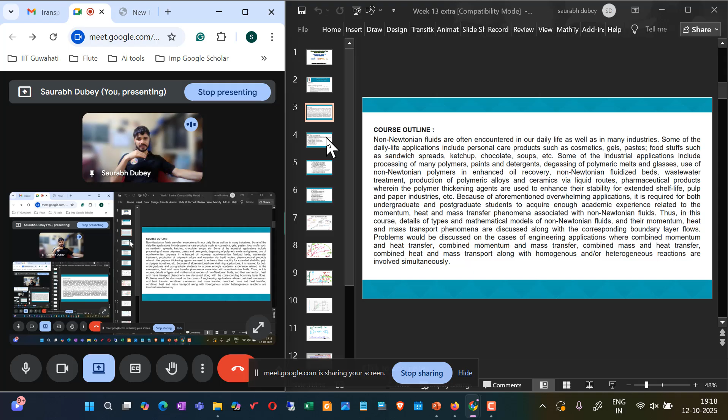The course plan was very straightforward. In week 1, we discussed the basics of Newtonian and non-Newtonian fluids. The introduction of Newtonian fluids was made, and then how these Newtonian fluids differ from non-Newtonian fluids was discussed in detail, including time independent non-Newtonian fluid, time dependent non-Newtonian fluid, and viscoelastic non-Newtonian fluid. So different types of non-Newtonian fluids were part of the first week, mostly the difference between Newtonian and non-Newtonian fluids, and the different types of non-Newtonian fluid, discussed in detail in the first four lectures of the course.

The second week was about how you are going to calculate the rheological property of any fluid which is unknown to you. For example, any gel in your daily life you encounter, and you want to measure what is the shear stress to shear rate relation of this particular gel, so as to compute its viscosity. If it is Newtonian, what is its viscosity? And if it is non-Newtonian, what is its apparent viscosity at a given shear rate? That is very crucial for you to appreciate at this point.

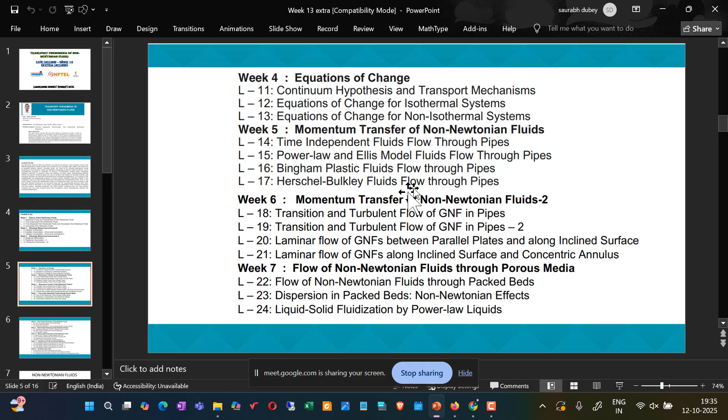After week 8, we are mostly having this thermal transport mechanism along with the momentum transport mechanism together. So free convection between two vertical plates we discussed, heat generation we discussed, and temperature distribution in the fluid confined between coaxial cylinders we discussed.

Those were very important topics, and we solved very beautiful questions step by step to make things easy for you. If you are revising all those questions that we have derived and discussed, and the questions given to you as a weekly assignment for the examples of the lecture, you will surely easily score well in the exams.

At the same time, clear your concepts and understand the subject deeply. That is the sole purpose of the overall effort made by Professor Nanda Kishore sir and our team, the entire NPTEL and SWAYAM team, and the policies. Because of this, this is provided to you.

So week 9 was on the thermal phenomena of non-Newtonian fluids. Again here, temperature distribution for fully developed flow of Newtonian fluid in a tube we discussed. Heat transfer combined with chemical reaction we discussed, and transpiration cooling we discussed.

So now, just wait, let me open it up.

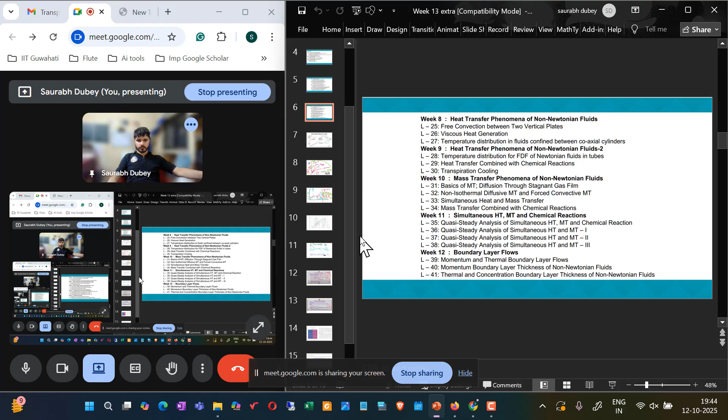So this week 12 that we discussed, everything on momentum and thermal boundary layer flows, momentum boundary layer thickness calculations for non-Newtonian fluids. Especially this particular boundary layer is very different from the concepts of boundary layer you know till now, in any other course or the basic transport phenomena course you have done. Here the fluid is non-Newtonian—pseudoplastic, dilatant, Bingham plastic—and you have tried to do calculations that are more towards the realistic systems in application.

And afterwards, in the last lecture, we covered the thermal and concentration boundary layer thickness. For this thermal and concentration case also, you have derived it, and for non-Newtonian fluids you have done it. We solved many problems through questions for the pseudoplastic system, Bingham plastic system, and lots of solutions are derived for the pseudoplastics, the power-law systems, in class.

So I hope this particular course, starting from week 1 to week 12, if you revisit, you will come to know that lots of very important concepts of fluid mechanics, heat transfer, and mass transfer became very handy in understanding this particular combo course, which is transport phenomena.

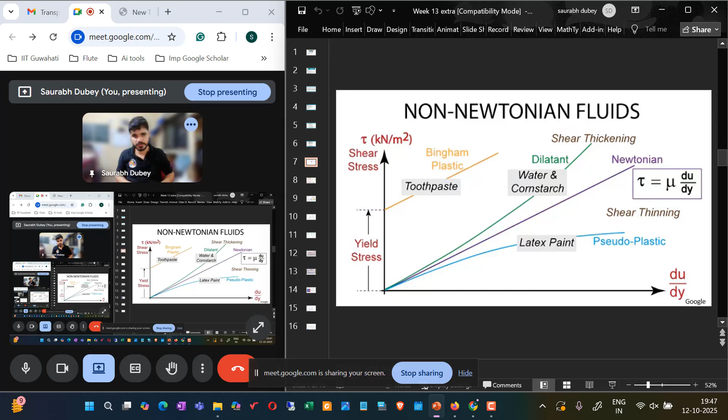So this covers non-Newtonian fluids, Newtonian fluid, pseudoplastic fluid, dilatant fluid, Bingham plastic - everything discussed in detail, including the non-linear behavior, that is the curve between shear stress and shear rate. We have also covered the constitutive models, the general models available for these non-Newtonian fluids. That we have discussed.

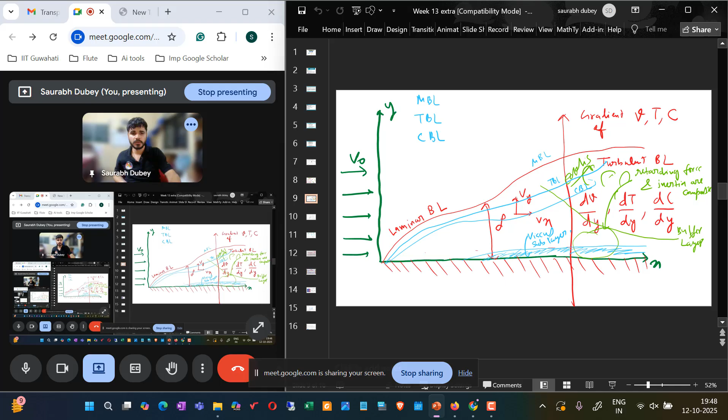Now if you see, the boundary layer theory that we have seen - we discussed that very important concept. There will be fixed some questions coming from this particular slide and this particular topic.

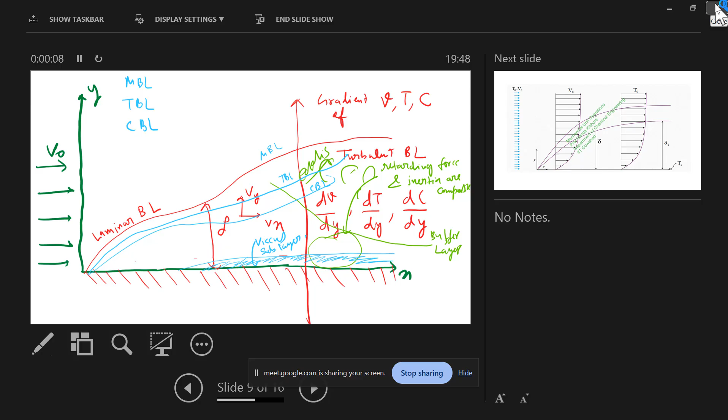The basic of this particular topic is - let me just expand it a bit. This particular topic is: what is boundary layer?

Boundary layer is the reason - simply just remember, boundary layer is a place where gradients exist. Gradient of what? Gradient in the fluid mechanics subject is momentum, which is velocity, so gradient of V. Gradient in heat transfer subject is temperature, gradient of T. Gradient in mass transfer subject is concentration, gradient of C. So gradient of velocity, temperature, and concentration - momentum, thermal and concentration respectively - are the gradients that usually exist in this particular coarse region, which is the boundary layer.

So have you ever thought about this - the viscous sublayer, the turbulent boundary layer, or the buffer layer - do they exist for momentum boundary layer only, or do they also exist for the thermal boundary layer and concentration boundary layer, right? Have you ever thought about this? Just give it some thought.

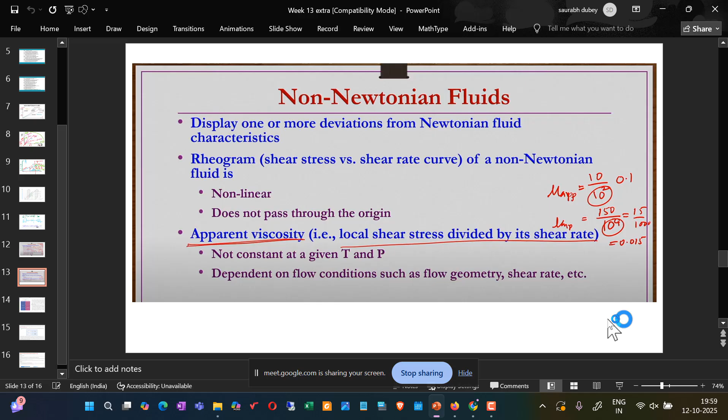And it is not constant at a given temperature and pressure, and it depends then on flow conditions such as flow geometry, shear rate, etc.

Very important and very good source of this difference between the Newtonian and non-Newtonian fluid I found on PEDIAA, and I have used and acknowledged here. You can also visit this particular link. There they say that the difference between the Newtonian and non-Newtonian is, Newtonian fluids are fluids that follow Newton's law of viscosity, which is mu du by dy, is shear stress. Now, this law indicates that the shear stress of a fluid is proportional to the rate of deformation, with the constant of proportionality being the viscosity of the fluid. This means that the viscosity of the Newtonian fluid remains constant regardless of the magnitude of the applied stress or the rate of deformation. Water, glycerol, alcohol, and mineral oil are a few examples of Newtonian fluids.

Now, Newtonian fluids have the ability to flow freely when subjected to applied stress. This is because the viscosity of the Newtonian fluid does not change with the magnitude of the applied stress. Hence, these fluids can be easily pumped or transported through pipes and channels without significant changes in their flow properties. They also exhibit laminar flow behavior at low flow rates and high viscosities. Laminar flow occurs when a fluid flow is in layers, with each layer moving in a parallel direction to the adjacent layer. So this is one.

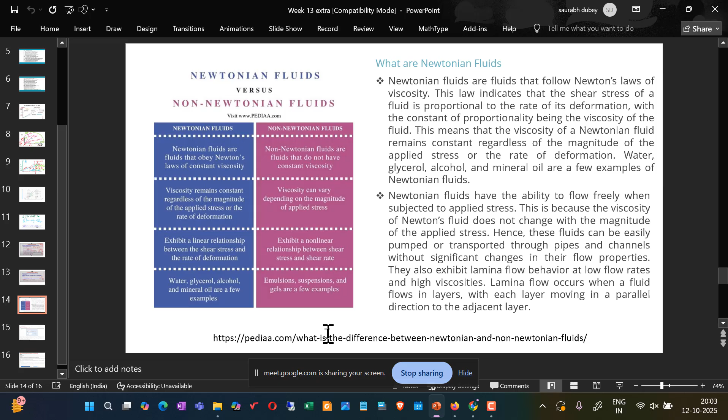So you see this, this slide is important. Newtonian fluids also have some limitations. These fluids may not exhibit the flow properties of real world fluids such as blood. So for that you need non-Newtonian fluid definitions.

Non-Newtonian fluids are fluids that do not follow Newton's law of viscosity, and depending on the magnitude of applied stress, the viscosity of the non-Newtonian fluid can vary. For example, emulsions, suspensions, and gels are examples of non-Newtonian fluids.

Non-Newtonian fluids exhibit shear thickening behavior or shear thinning behavior. Shear thickening behavior occurs when the viscosity of the fluid increases with the magnitude of the applied stress, while shear thinning behavior occurs when the viscosity of the fluid decreases with the magnitude of the applied shear stress.

These liquids also show complex flow patterns such as vortex formation, shear banding, and flow instabilities. These flow patterns can significantly impact the transport and mixing properties of non-Newtonian fluids. Let me just make this point clear, guys, then it will become easy for you to appreciate this.

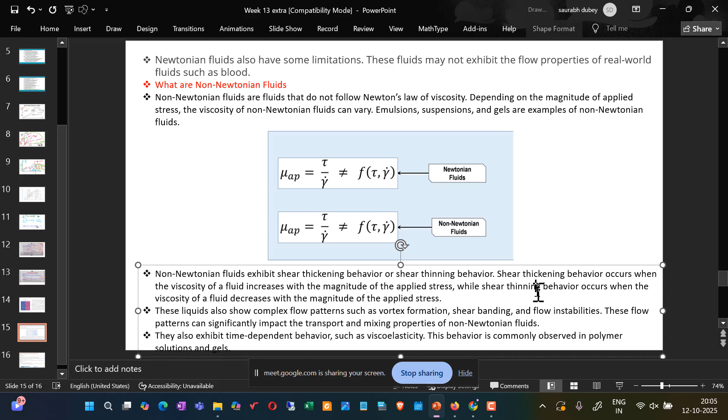So in this one, for the Newtonian case, mu apparent is what? Shear stress divided by shear rate, and this has to be corrected. So mu apparent is nothing but mu, and we can correct it like this. So I can't write, let me just fix my pen tablet. Okay, now I can write.

So this mu apparent equals mu equals what? Tau divided by the rate, for Newtonian fluid, that holds. For non-Newtonian, this is not true. Rather, this mu apparent is a function of shear rate.

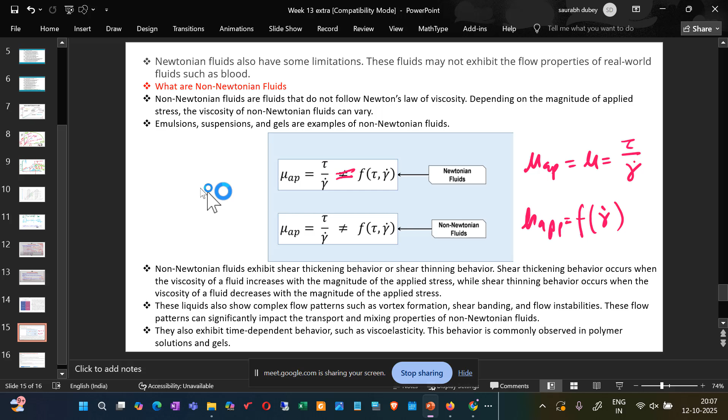So now you see this, the last slide about the definitions and differences between Newtonian and non-Newtonian fluids. The main point is the definition itself: Newtonian fluids are fluids that obey Newton's law of constant viscosity, whereas non-Newtonian fluids do not. In a Newtonian fluid, the viscosity remains constant regardless of the magnitude of the applied shear stress or the rate of deformation, while the viscosity of a non-Newtonian fluid can vary depending on the magnitude of the applied stress.

Flow behavior: Newtonian fluids exhibit a linear relationship between shear stress and the rate of deformation, du by dy, while non-Newtonian fluids exhibit a non-linear relationship between shear stress and shear rate, as we have seen. This is the non-Newtonian relationship I am talking about, this non-linear graph, for the pseudoplastic type, where it is not possible to hold a constant viscosity.

Examples of non-Newtonian fluids are emulsions, suspensions, and gels. And for Newtonian fluids, you have water, glycerol, alcohol, and mineral oil.

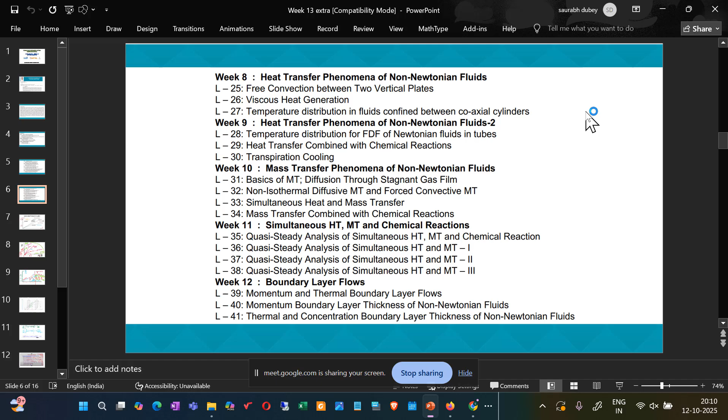Okay, so let's wait, I will just open it. Okay, so, or assignment, so we, let's present it, where is this?

So this is week one, right? I will just present and close it. So this was week one of this particular course. Very quickly, I will be going through the slides.

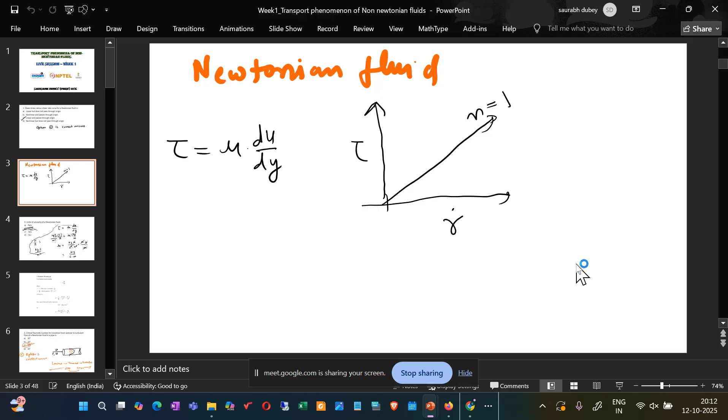In this particular week, the main discussion was on the basic differences between Newtonian and non-Newtonian fluids and the models that are there. The first question we solved was around the shear stress versus shear rate curve for the Newtonian fluid, and we know that for the Newtonian fluid, strict proportionality was correct. That's what we discussed in this graph. Then the units of viscosity of Newtonian fluid we saw is Pascal second.

I have also done all the steps for you to understand this, so you can just go through this particular slide and get information about it. The next question was the detailed one - critical Reynolds number for transition from laminar to turbulent.

So for the pipe flow, where the fluid with density rho and viscosity mu is flowing with velocity v, the laminar to transient to turbulent changes were happening, right?

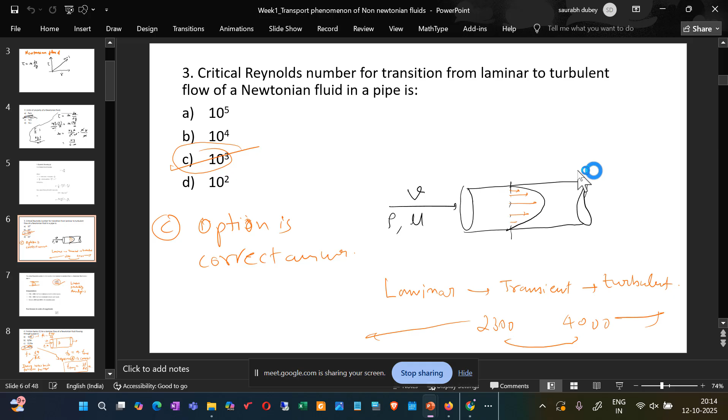So the critical Reynolds number for different systems we have seen, and the critical Reynolds number is fixed for the transition from laminar to turbulent flow in the Newtonian fluid inside pipe flow - that is 2300. Through the interpretation, you got to know that if the Reynolds number is less than 2300, you say it is laminar, and if it is more than 4000, then the flow is turbulent, chaotic and mixed. In between this is the transition zone, right?

And then the question on the friction factor F for laminar flow of a Newtonian fluid flowing through a pipe we have solved. We have seen that this particular friction factor F for the laminar flow of this Newtonian fluid through the pipe is 16 upon Re, which is used in this Darcy-Weisbach friction factor, and this is used in Darcy's equation, which is delta P by L equals 4F V square upon 2gD, right?

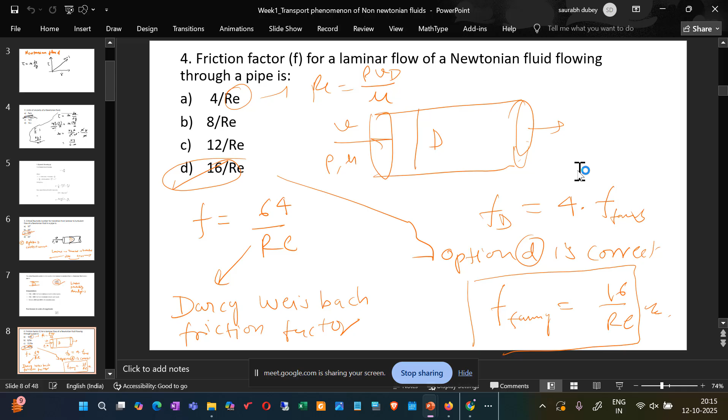And also this FD, if you want to say Darcy's one, it is 4 times of F fanning. So F fanning is 16 by Re, right? So this is the detail about it.

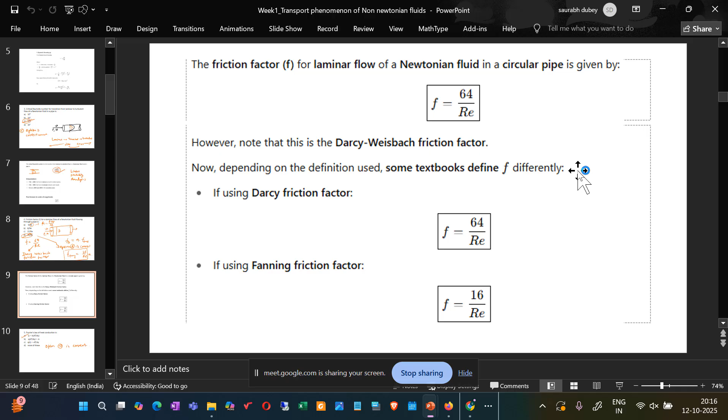Moving towards the next question, it was on the Fourier law of heat conduction - very important, very classical equation of heat, also the first equation that you study when you are doing the inception of this particular course. So I think the first 11 lectures we will be revising in detail. The last lecture I have done in detail.

I will be revisiting the last 2 or 3 lectures since they're recent, so you can revisit or re-watch those lectures. Around these 12 or 13 lectures, that is 26 hours each, it will be giving. So the entire package now you are having - 41 lectures, and then this 26 hours of the practice package through these problem solving sessions is given to you to master this particular transport phenomenon.

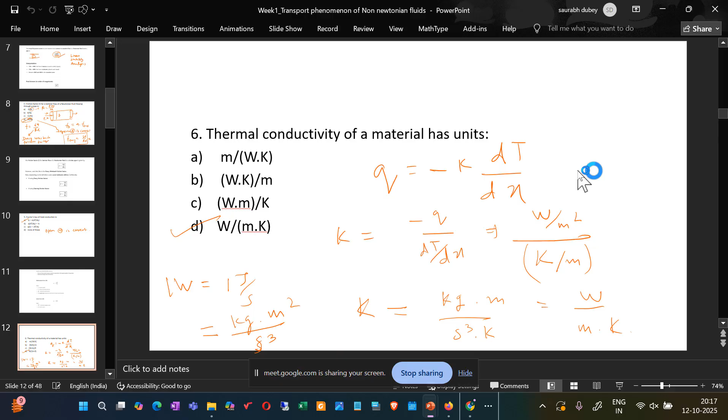Right, so Q equals minus K dT by dx is the Fourier law of heat conduction. Here you see these details are given. The next question was this thermal conductivity of the material and how the unit of this is derived.

Prandtl number - these non-dimensionless numbers are very important in terms of actually feeling the subject. So this Prandtl number for the Newtonian fluid is defined as the ratio of momentum diffusivity to thermal diffusivity, which is nu by alpha, where alpha is k upon rho Cp, so this becomes Cp mu by k. Based on whether the Prandtl number is greater than 1, less than 1, or equal to 1, you can actually predict the thickness of the thermal and momentum boundary layer.

That we have discussed in the last lecture, so you can relate that, right? So there you have derived it. Okay, so let's move ahead.

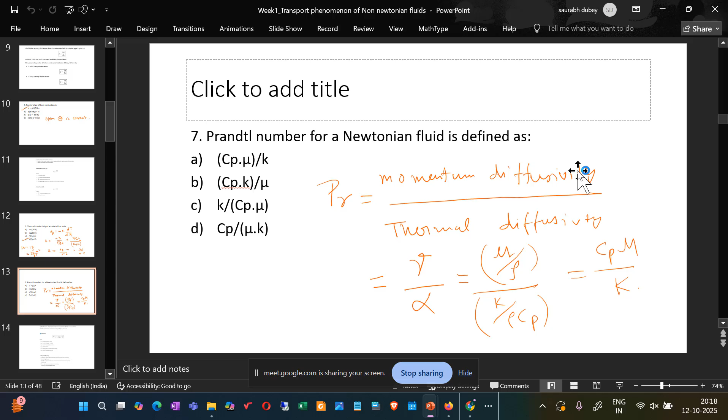The momentum, thermal and mass diffusivity - what is the unit of this? So we can actually solve for that. It is meter square per second, right.

Next was the Schmidt number for a Newtonian fluid and how it is defined - the ratio of momentum diffusivity to mass diffusivity. This momentum diffusivity is still in the numerator; just the denominator changed from thermal diffusivity for the Prandtl number to mass diffusivity for the Schmidt number. So this is D-A-B, right, this is the diffusivity.

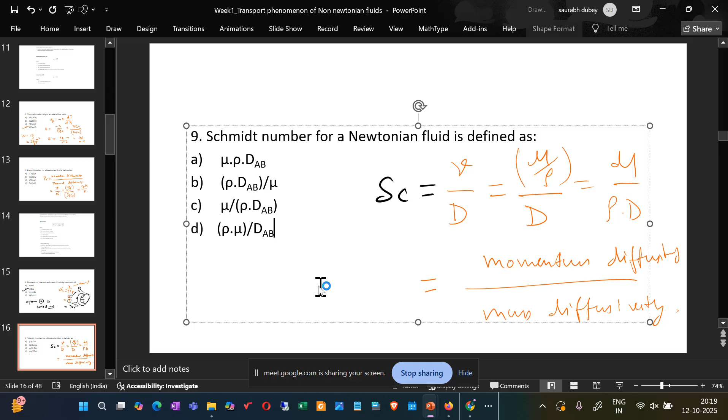So based on that, if you see this one, the Prandtl number: if Prandtl number is less than 1, greater than 1, equal to 1, we had some examples. For example, Prandtl number less than 1 means liquid metals. That means momentum diffusivity is less than thermal diffusivity, so the thermal boundary layer is bigger. Momentum diffusivity dominates for the greater than 1 case.

This is the part we discussed last week also, in week 12, in terms of thickness of the momentum boundary layer, thermal boundary layer, and the mass or concentration boundary layer. If it is equal to one, which is the case for air, water at moderate temperature, momentum and thermal diffusion thickness of the boundary layers will also be same.

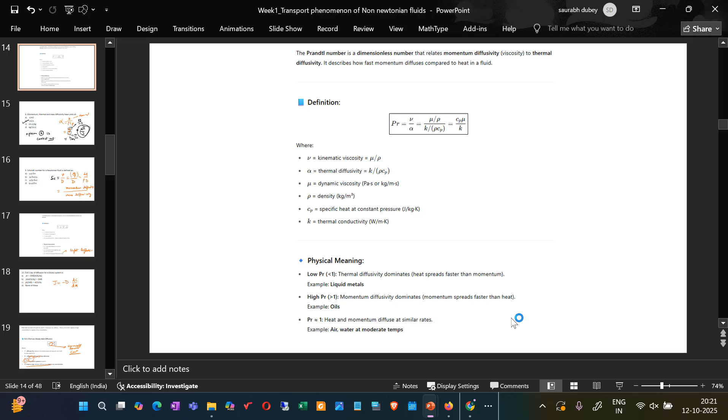And this is for the Schmidt number. The bottom one: if Schmidt number is less than 1, mass will be diffusing very fast, so the concentration boundary layer will be thicker than the momentum boundary layer. If the Schmidt number is greater than 1, then momentum diffuses faster than the mass, which is the case for oils and gases having less than 1.

These are the basic equations. So for the temperature, we derived the Fourier's law, Newton's law of viscosity, which is the momentum, and where concentration is fixed. This is Newton's law of viscosity, which is mu du by dy. This is Fick's law, here it is for flux.

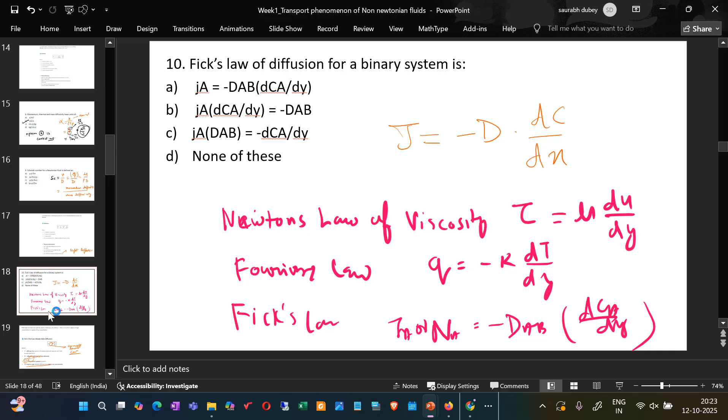Q equals to this, like this, J equals minus D_AB times the gradient. So this is the one that we are talking about.

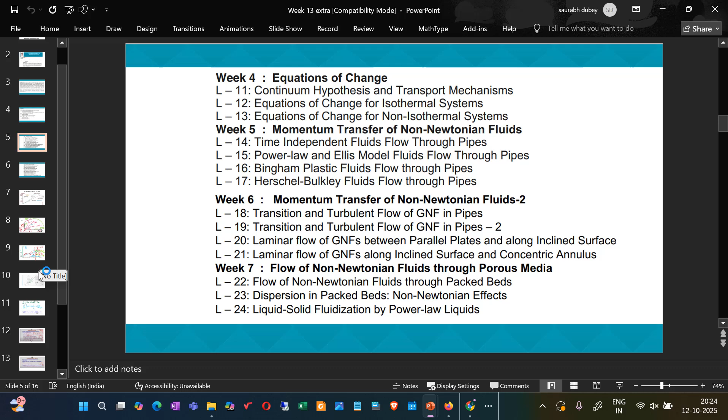Now, if you see this question number 12, which is very simple. Let me just correct it. Very basic equation, the same equation we have discussed, using here for the Newtonian fluid. It's an exactly very easy problem.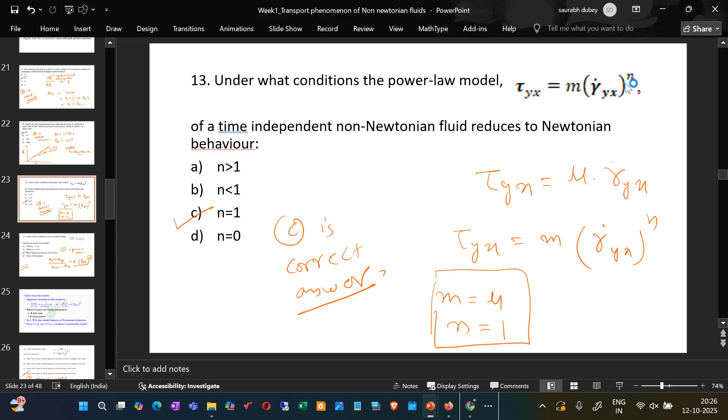And then this model reduces to the power law model under what condition? The cross viscosity model: mu minus mu infinity, divided by mu naught minus mu infinity, equals to 1 by 1 plus k gamma dot to the power n. And this, under the limit where mu is very small compared to mu naught, or mu is very much larger than mu infinity, reduces to the power law, right.

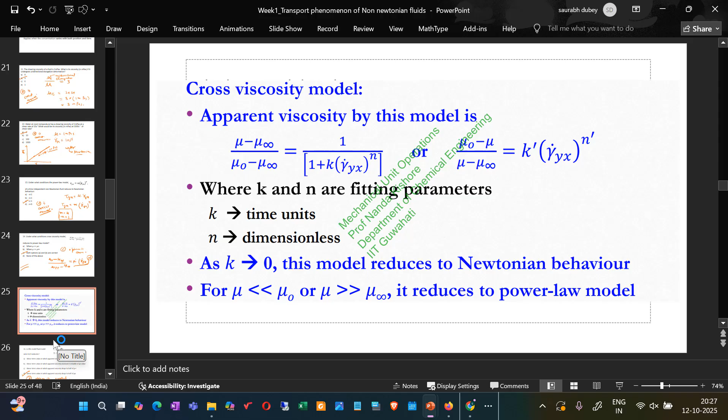So how this happens, this particular slide is in review. So this is part of the lecture, so from there I have taken this. Then this is the Ellis model question.

So, Ellis model says this, which is in front of you. In this one, what does tau half indicate? It indicates the shear stress value at which the apparent viscosity drops to half of its zero-shear value.

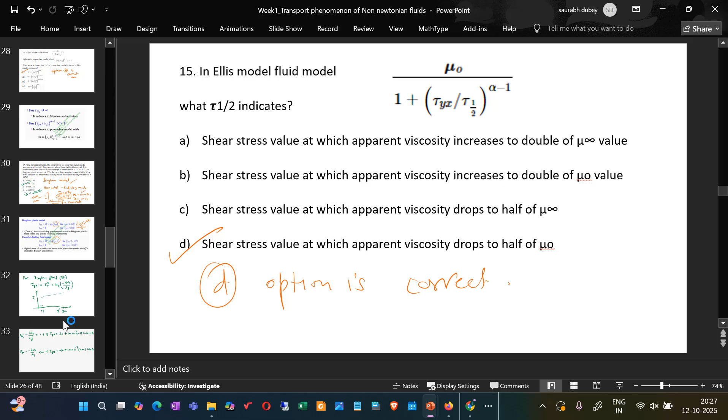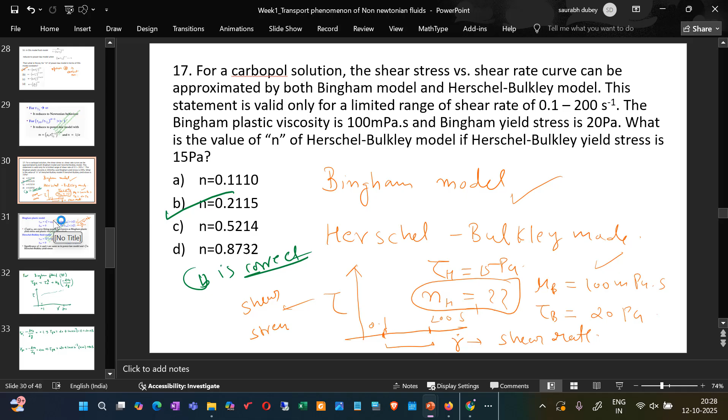So these are all questions you practice. Please practice, it will help you in actually tackling these problems based on the Herschel-Bulkley model of fluid. Based on that, you solve some questions. Right, this is the approach you have to follow.

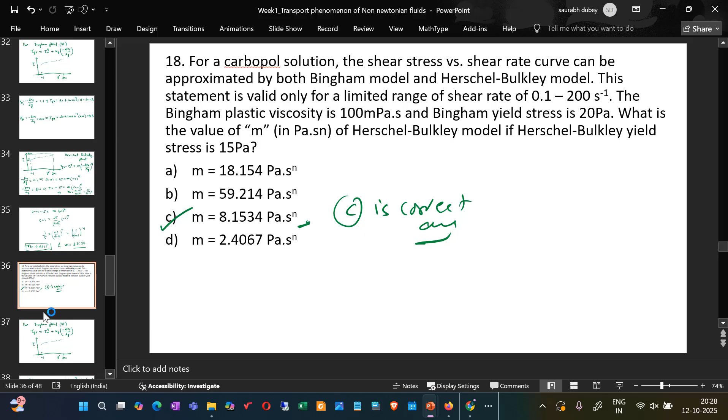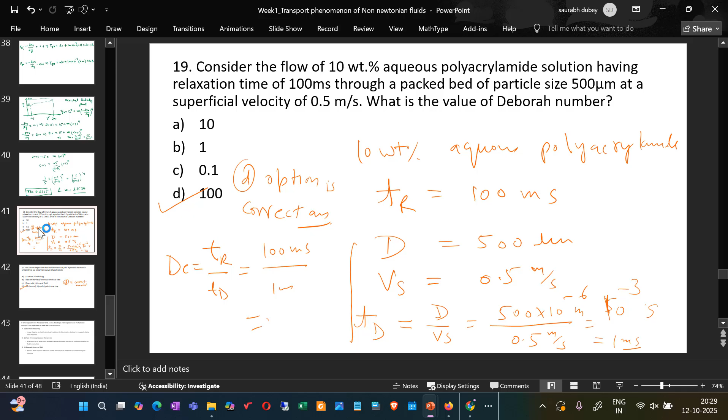Okay, and then this is the main details about the same. This was for the thixotropic fluid.

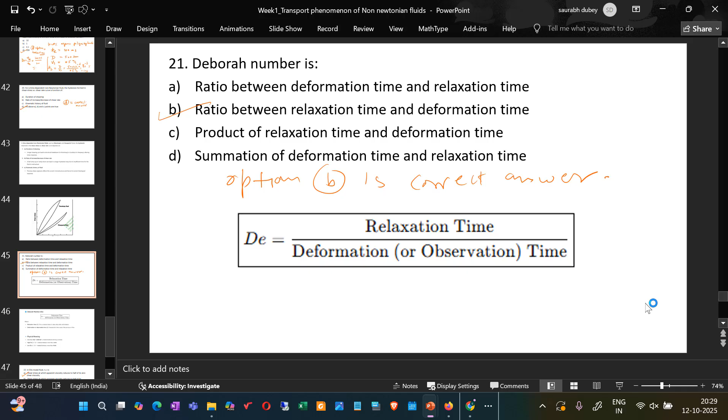About the Deborah number, it is the relaxation time to the deformation or observation time, right? So this Deborah number is between the relaxation time and the deformation time. So how is this derived or defined? Let's discuss. The Deborah number is relaxation time to the observation time.

So relaxation time is the time a material takes to relax stress after deformation. And observation time is the characteristic time scale of the process or flow. So the physical meaning describes how solid-like a material behaves during the process.

For example, if the Deborah number is very high, it means its relaxation time is very high, or the deformation or observation time is very low. This means the material behaves more like a solid, it will take very large time to relax.

Otherwise, the material behaves more like a fluid. So all fluids have low Deborah number, right?

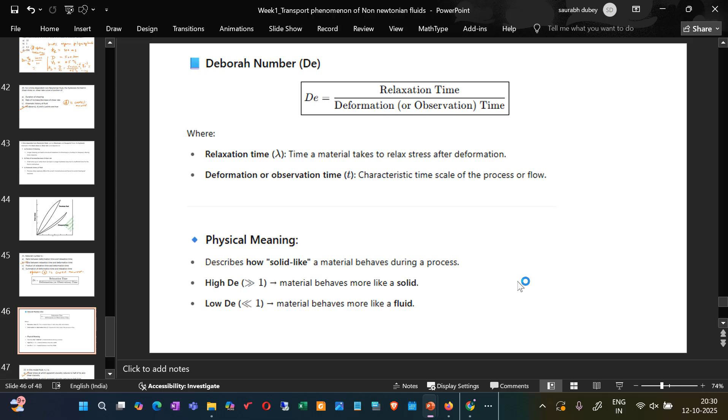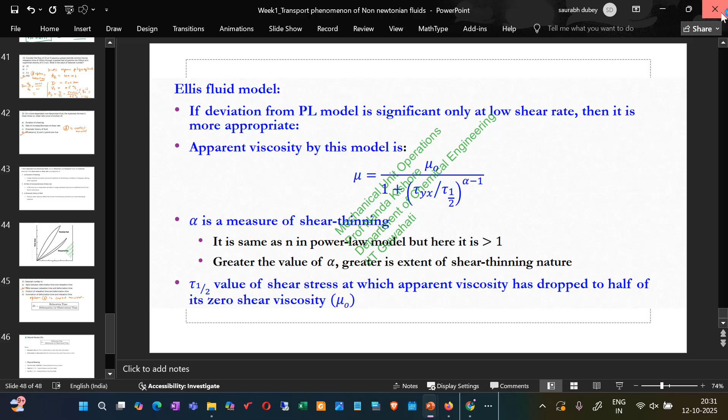The next one, save it. The next one is week two. Again we started with the basic classifications of the same.

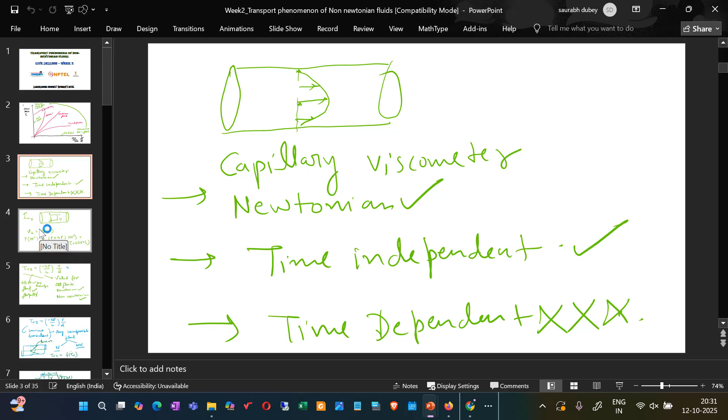Then this, how capillary viscometer, Newtonian time independent and time dependent are discussed. We have seen how this main equation, the balance equation, is used, valid for both Newtonian and non-Newtonian fluids. Before this, while deriving this, it was just the balance. We have not introduced any assumptions on the property of the fluid or the type of fluid that we are dealing with.

The next slide says about this laminar flow. This is valid for laminar, any incompressible fluid, be it Newtonian or non-Newtonian. So those things we have discussed.

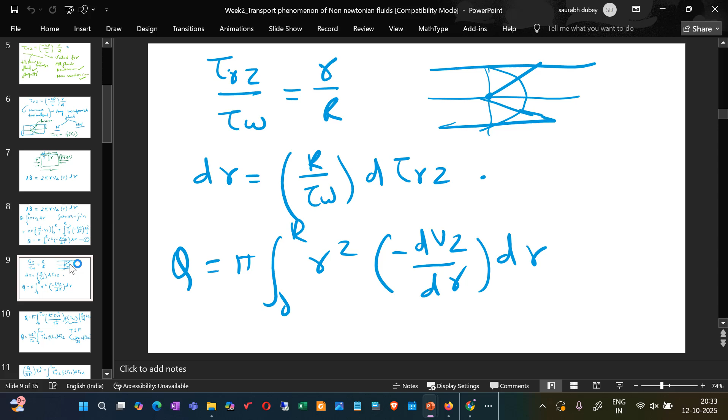We have seen how the volumetric flow rates are calculated, finally leading to this particular result: the shear rate, nominal or apparent shear rate at wall for the generalized Newtonian fluid.

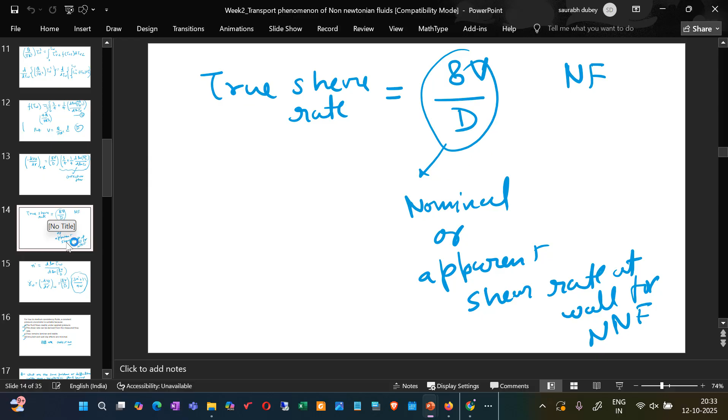What are some problems or difficulties with non-Newtonian fluids because of which their rheological measurements are difficult? They are nonlinear, there are dispersive and dissipative effects, and there is time dependent nature, right? So all these are different.

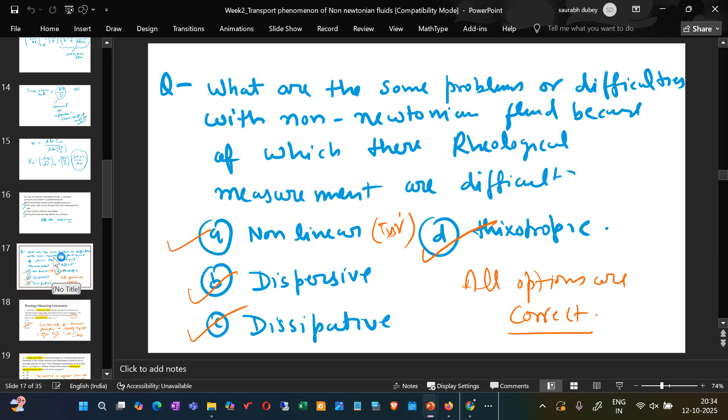You see that for Newtonian fluids, this one is the same, and for power law, the nominal and apparent shear rate are the same. But for the true shear rate, it is modified like this, so that 32 will be modified by this factor, which is 3n' plus 1 by 4n'.

So it will be apparent, the shear rate will increase. So for n less than 0.5, this shear rate increases for a given shear stress, for a given velocity. If n is the same, then it is increased, there will be more shear rate. That fluid must be what?

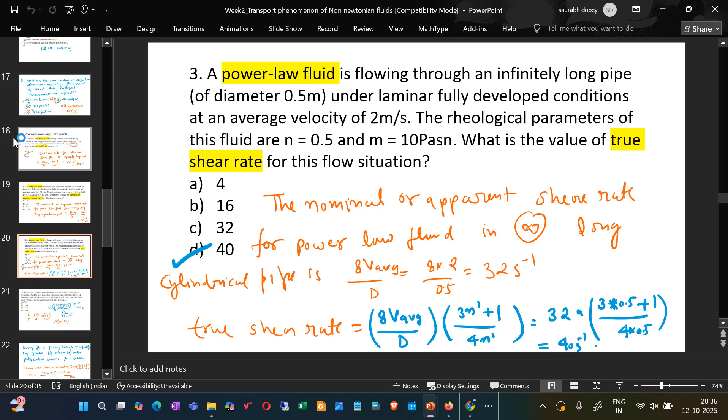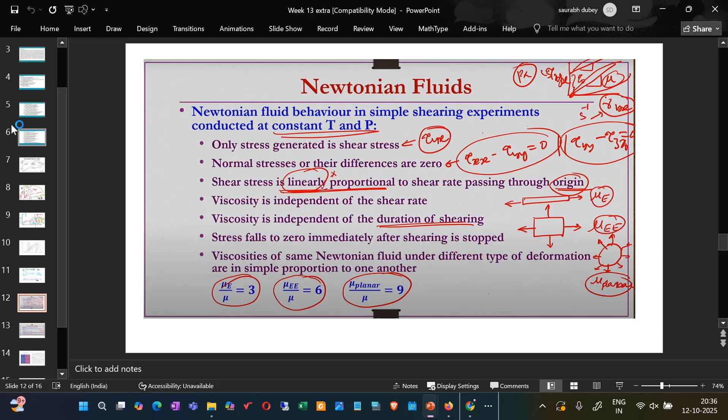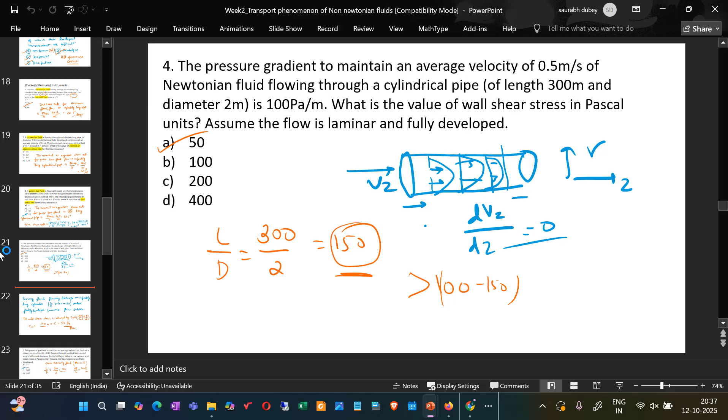So, we have done that. Very easy questions we have solved many times. So in this one, wall shear stress is calculated. Similar questions you will be getting in your final exams, right?

So the thing is, revise these all questions. Read this question again and then see whether you are able to collect the information that we have discussed so far in the course through questions, through class examples, or through oral presentations that were there. That is the main task of the course. So you please read this question or observe this. Meanwhile, I will be joining.

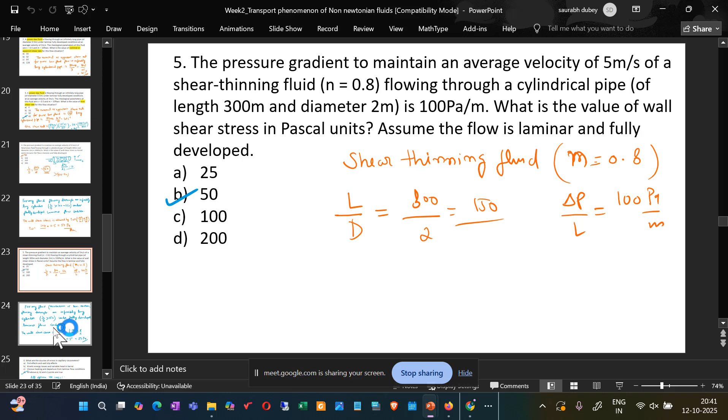Okay, so I hope you solved it because we have already discussed it sometime, but very easy question. Just you have to observe the words, read the question very carefully because sometimes, most of the time, we miss out something by reading the question and then we have to pay the cost for that. We end up doing the incorrect solution, right? So this is the one.

For any fluid, Newtonian or non-Newtonian, flowing through an infinitely long cylinder, when the length is very higher, length by diameter is greater than 150, under fully developed laminar flow condition, the wall shear stress is given by this.

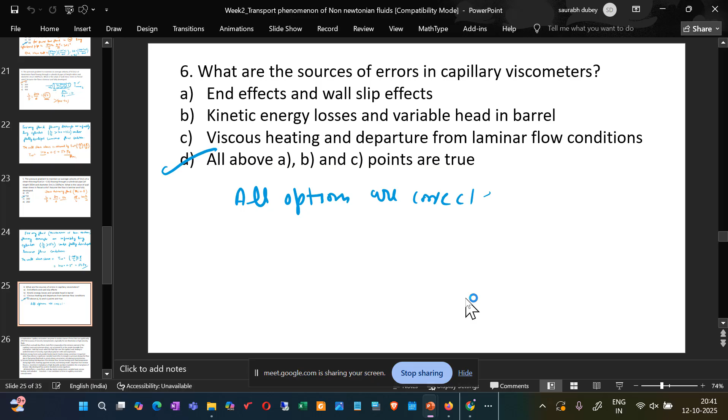What is the source of error in the capillary viscometer? The end effects, wall slip effects, kinetic energy loss, and the variable head in barrel, viscous heating and departure from the laminar flow condition. These are correct, so these all are correct. So these are the details of the same question.

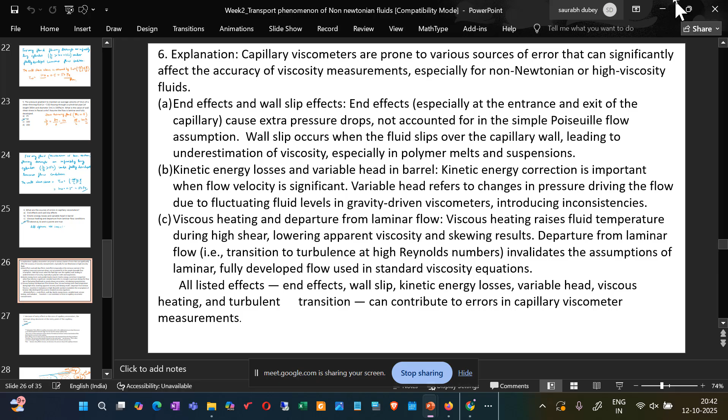That we have seen in the last slide. Okay, so let's revise it, reread it and revise it because here itself you just complete this. Okay, so end effects and wall slip effects are there, and there is this kinetic losses, and there is this variable head, then this viscous heating, and because of that there is departure from this laminar flow condition. Okay, so that is the one.

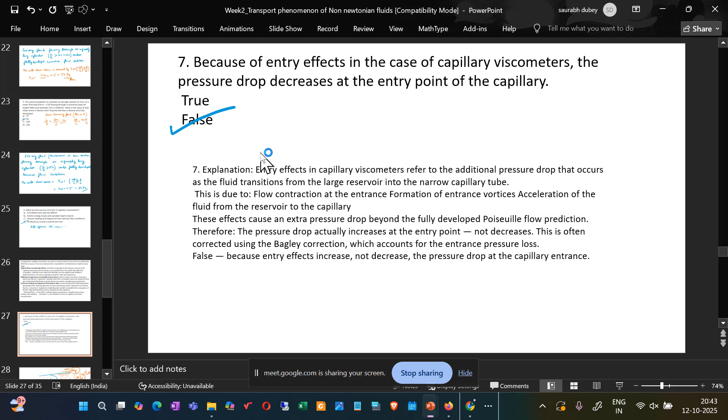So what will happen because of the entry effect in the case of capillary viscometer? The pressure drop will decrease at the entry point of the capillary. Is it true or false? So we have discussed this in detail. True or false, and the detailed explanation is below. Please go through this. I am just pointing out what all questions we have gone through.

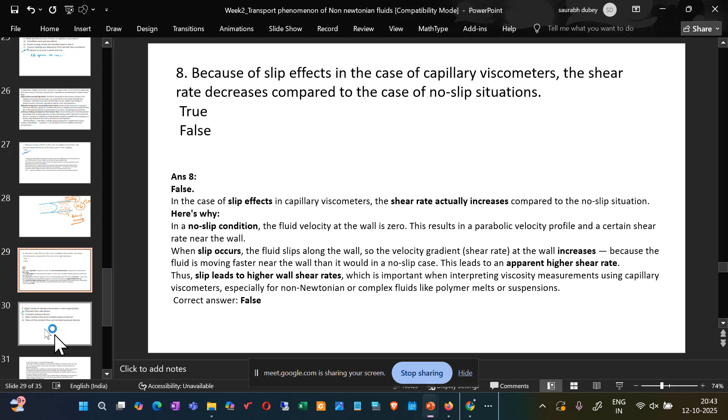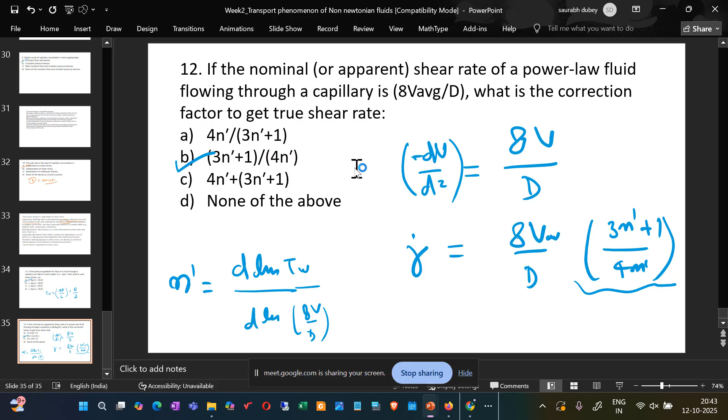So these were some very important discussions that we have made. This is the one about which we have solved one question. This is coming in the true shear rate formula, 3n dash plus 1 by 4n dash. Okay, so please look at this and revise it. This is the standard formula which is used for wall shear rate, right? So V2 is done.

Still 10 to 20 minutes are there, so I will be revising the most difficult lecture, which was this non-isothermal week 4 lecture, lecture number three of week 4. I will be again taking you to that because next 20 minutes we will revise, because that is a bit difficult, and that will help you to get through lots of other problems that we have discussed in the present weeks which came to that. Right? So let us just take that particular slide.

It is week 4, last slide, I think. Not actually. Okay, so...

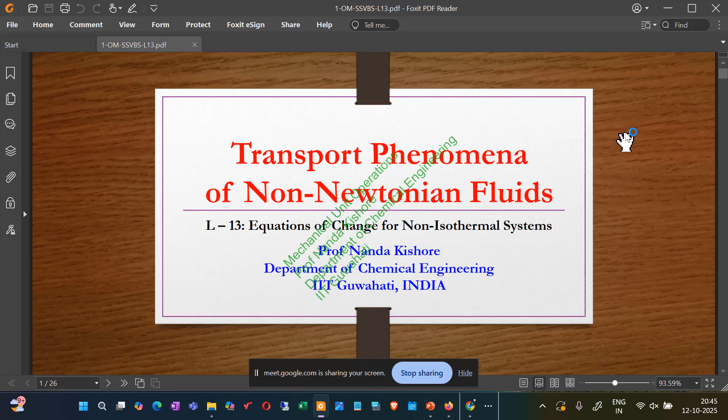So this is transport phenomena of non-Newtonian fluid in the equation of change for non-isothermal system. In this one, this is around 26 slides, and we will be very carefully observing everything because this slide is very important. This topic was a bit difficult in terms of calculation because here some thermodynamics also came into the picture, but this is complete basics, and all the terms are coming up because of which is leading to the thermal effects in the system, right?

So before this, you had this derivation of continuity equation, Navier-Stokes equation, and before that you had the definitions of continuum hypothesis and then Newtonian to non-Newtonian effects and how they are coming into the picture. So continuum hypothesis, we have discussed transport mechanism, we have discussed all the three transport mechanisms, the molecular transport mechanisms, types of that we have also discussed. Analogies, you have seen partial, total, and substantial time derivatives, how they are differing with each other.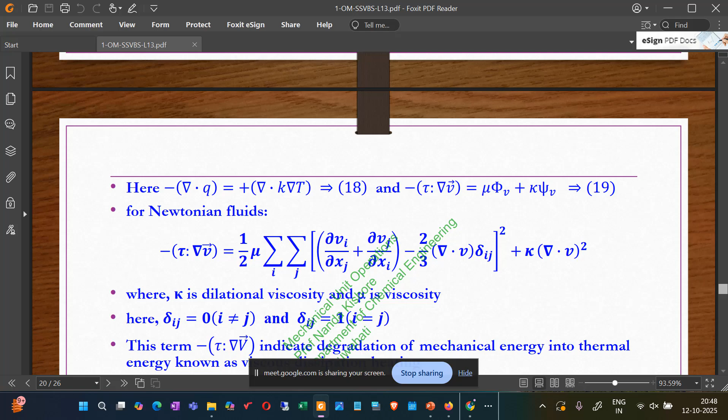So now slide 24 is there, then this one we leave, this one too. So 22 slides are very important, and we only need to focus on those. It will take around 20 minutes for us to go through it. Let's expand it again.

Why am I revisiting this slide? Because I myself found it a bit tricky or tedious while going through this, and that's why I am revising it for you. So now we come to the energy equation, which is the conservation of energy.

Consider a stationary volume element fixed in the space through which the fluid is flowing. Kinetic energy and internal energy may be entering and leaving. All other slides we have revised over the last two lectures, revisiting everything we have seen as a summary in this first hour of the lecture, and we have also touched on some of the main concepts.

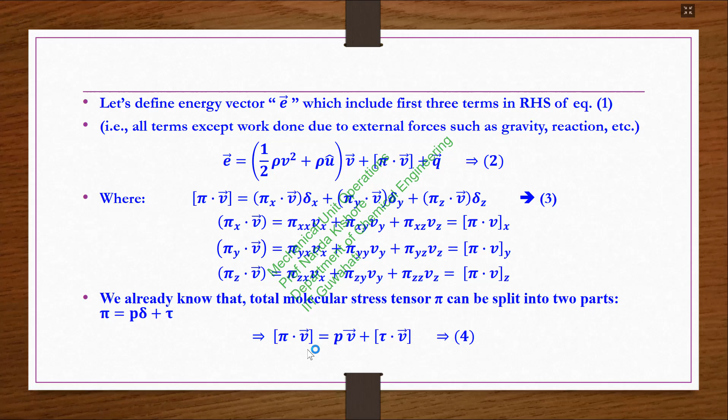We already know that the total molecular stress tensor pi can be split into two parts: one is because of the isotropic normal pressure, and another is the deviatoric shear stress. So if you split this pi in terms of p plus tau, then you will get pi dot v equals to p v vector plus tau dot v.

And if you put that and rearrange the things accordingly, you will be getting this one. So where u cap, V cap, and H cap are internal energy, volume, and enthalpy of the system per unit mass. So now converting equation 1 into the mathematical form - how you are converting equation 1, which was the balance, into this mathematical form, this one.

So if you see, this was the equation, and in this one, pi dot v you are having p v dot plus tau dot v. If you just... we know that this one, how this is just okay. So you just multiply this by rho v, this is just rearranged in this way.

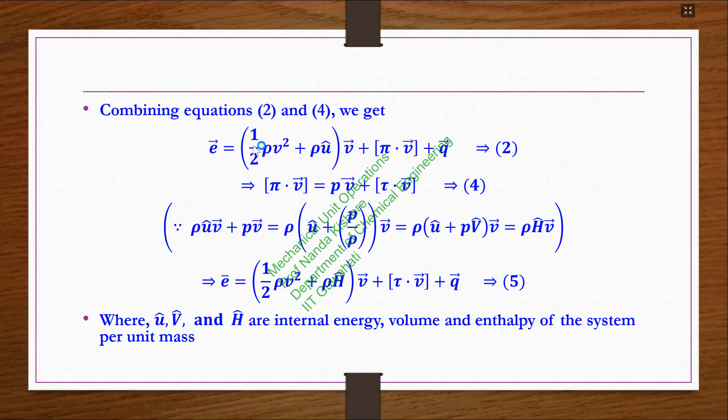And this, when you take common, this... so this u plus pV we can write as enthalpy, and based on that, enthalpy is coming into the picture. For this, the same E can be written in terms of enthalpy, right?

So the rate of increase of kinetic and internal energy within the control volume element is this one, where U cap is the internal energy per unit mass, specific internal energy, and rho U cap is the internal energy per unit volume. Just density is multiplied, mass gets cancelled, and volume comes into the denominator. Also, this kinetic energy can be defined in this way for all directions x, y, and z.

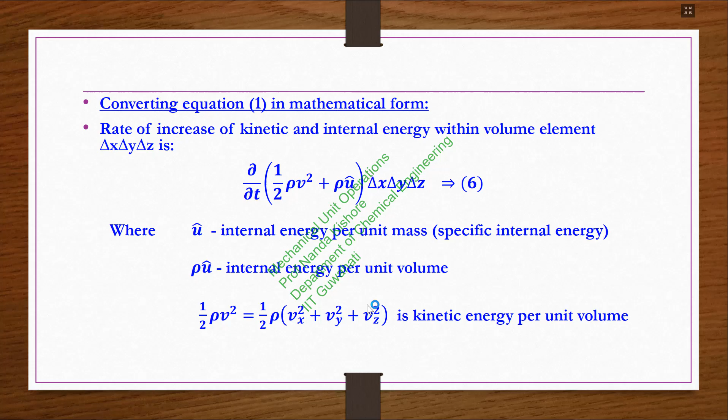So the amount of energy entering and leaving across the face of delta x, delta y, delta z is written in this way. The rate of work done on the fluid by the external gravitational force is the dot product of V and this term, which gives you these things.

So now substituting all the equations into equation 1 and setting it out, finally we get the final equation, which comes up like this. This bigger equation, having the rate of increase of energy per unit volume, kinetic plus internal, is given by the rate of addition of energy per unit volume by convection, by conduction, the rate of work done on the fluid per unit volume by pressure forces, by viscous stresses, and by external forces. External forces may be anything: reaction, nuclear forces, or other critical forces.

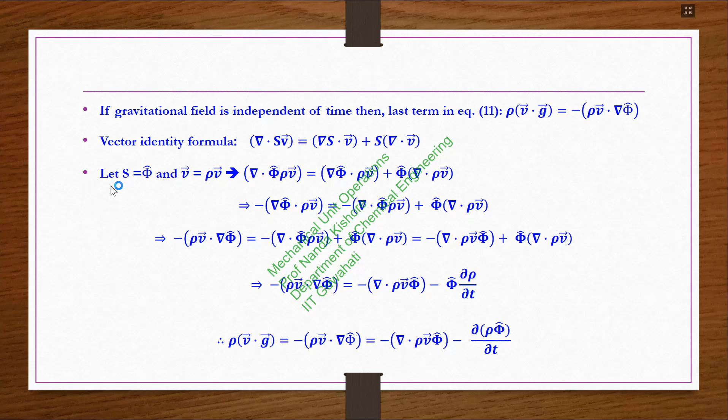This is general, not restricted to any particular potential.

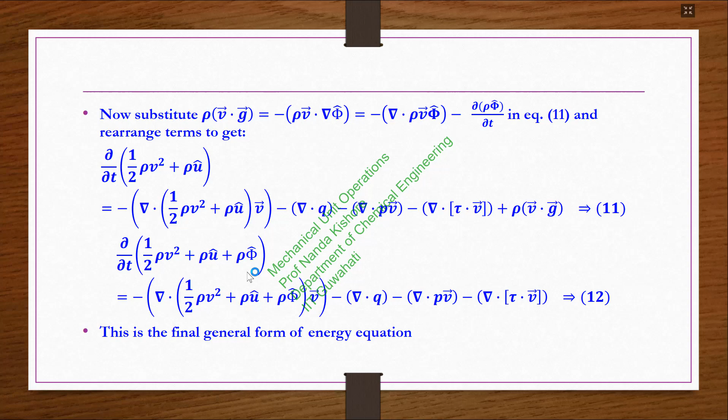So special forms of the energy equation exist sometimes. We have the equation of change for kinetic energy, obtained by the dot product of the velocity vector with the equation of motion, followed by lengthy rearrangement, and you get this one.

So this equation of change for the internal energy, in terms of U, can also be derived.

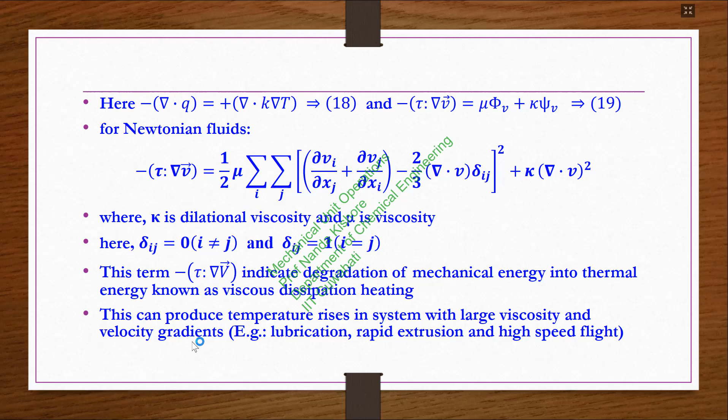In terms of enthalpy also, this equation of change for the enthalpy of an element of fluid moving with velocity v is derived. The equation of change in terms of temperature is also derived, since that is the measurable quantity. This can produce temperature rise in systems with large viscosity and velocity gradients, like in lubrication or rapid extrusion in high speed flights.

So these were the key findings and the main equation that we derived. The detailed one was the last one, the complete energy equation.

These were under some assumptions. For a fluid at constant pressure, this term becomes zero. For a fluid with constant density, del ln rho by del ln T at constant pressure equals zero, and for a stationary solid, V vector equals zero. Considering these, you get the correlations that come into the picture, expressed in terms of the measurable quantity, temperature.

All these equations can be derived in terms of thermodynamic properties like internal energy and enthalpy, as we have seen. But it is good to derive them in measurable terms, because that is what is known to us. We can use transducers or measuring instruments to gain knowledge about them, and then use these equations to relate to our experiments. That's why it's crucial.

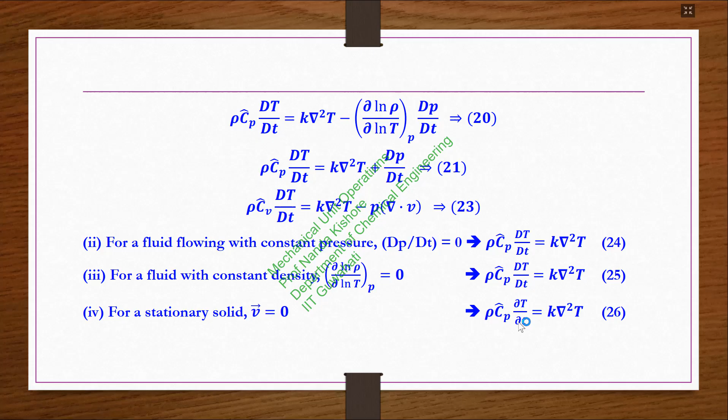So that is it for this particular lecture. You can revisit it and derive all the equations on paper one by one, then you will feel it better. Though all the steps are detailed, maybe something is left out somewhere.